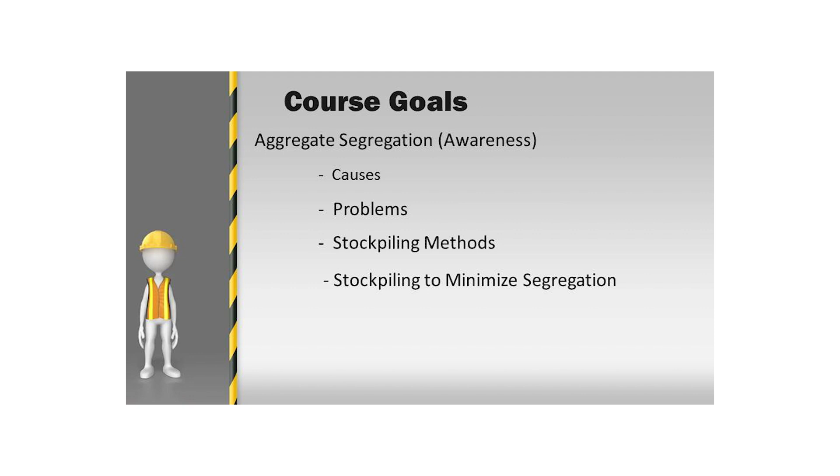Aggregate segregation is the separation of coarse and fine aggregate. We will learn the causes of segregation, the problems created, and ways that we can stockpile to minimize aggregate segregation. We will learn of the importance of proper loadout and sampling techniques, how to minimize segregation in loads or samples, and explore potential problems and solutions.

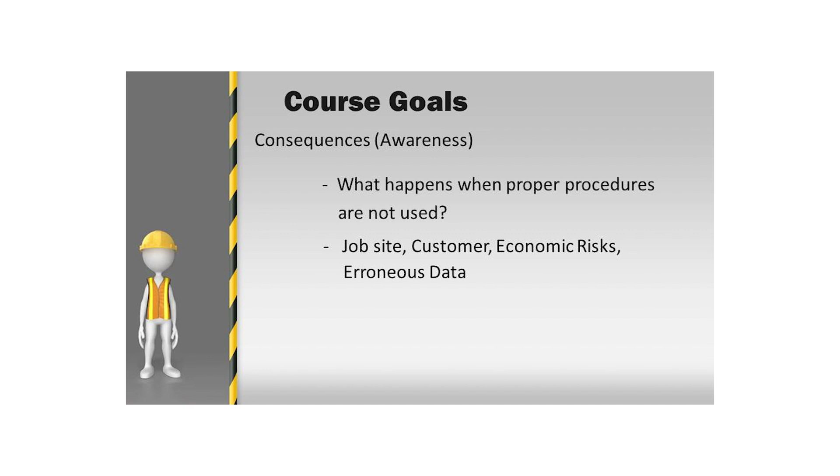There are many possible consequences, most of them negative, associated with segregation of aggregates. The techniques learned here will minimize segregation and the associated risks. It is important to remember that we are using a relatively small sample, in this case 70 pounds of material, to make a determination of the contents of a very large stockpile, in this case nearly 50,000 tons. So we must use consistent and approved techniques to ensure the reliability of our test results.

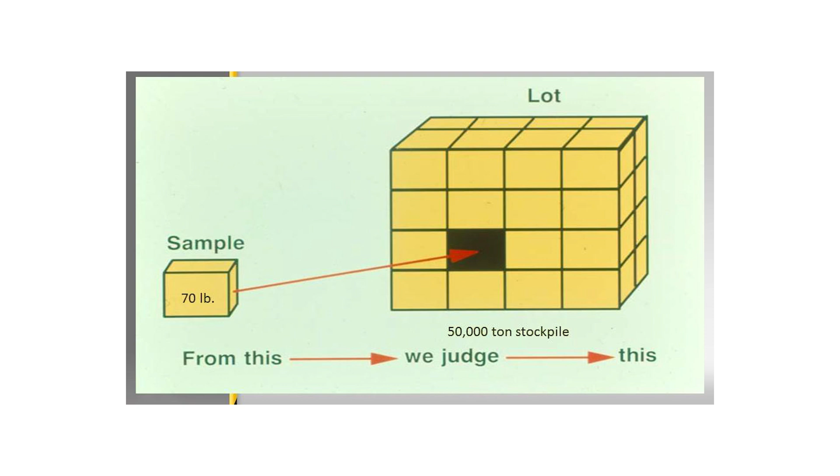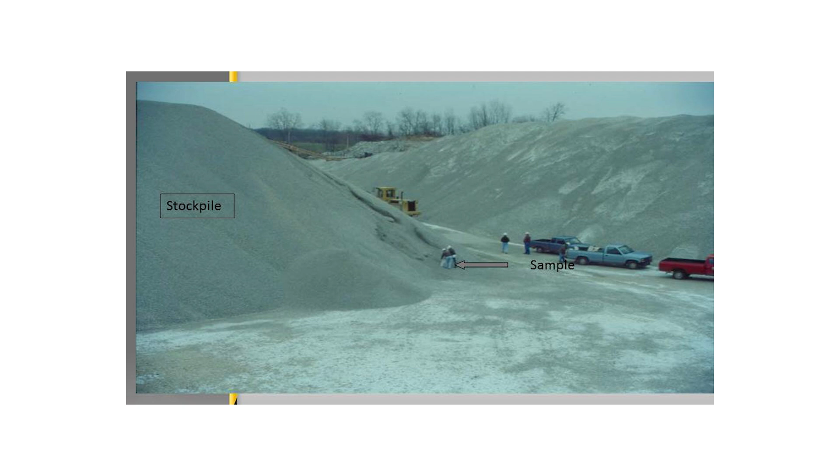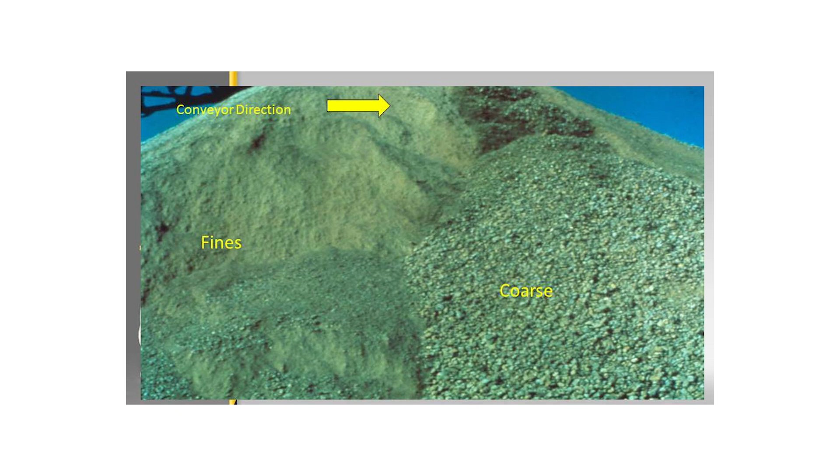Knowledge of the placement of the material into the stockpile is critical to recovering representative samples. In this photo, the conveyor is moving from left to right. You should note that the coarse material is concentrated towards the front of the stockpile, and the fines are toward the rear. This illustrates an extreme segregation case, but we need to be mindful that all aggregates exhibit similar characteristics.

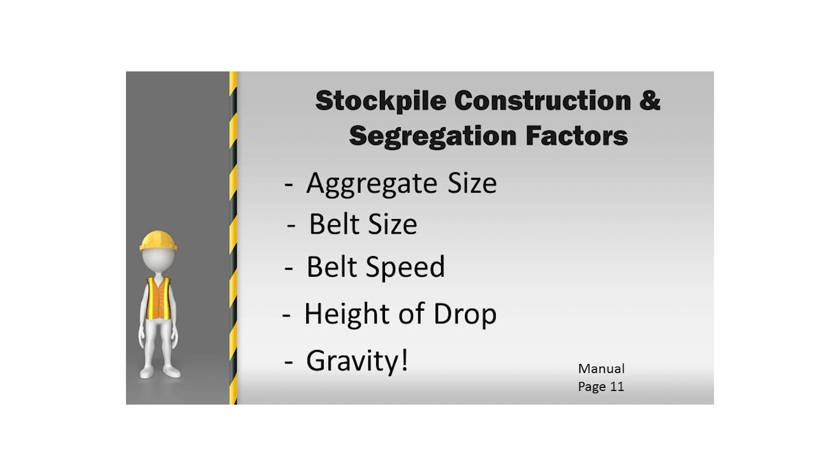Here are the stockpile construction and segregation factors: aggregate size, belt speed, the height of drop, and gravity. This can be found on page 11 of your manual. In addition, wind and weather, moisture content of the product, stockyard space restrictions, special products and materials can have various different segregation characteristics.

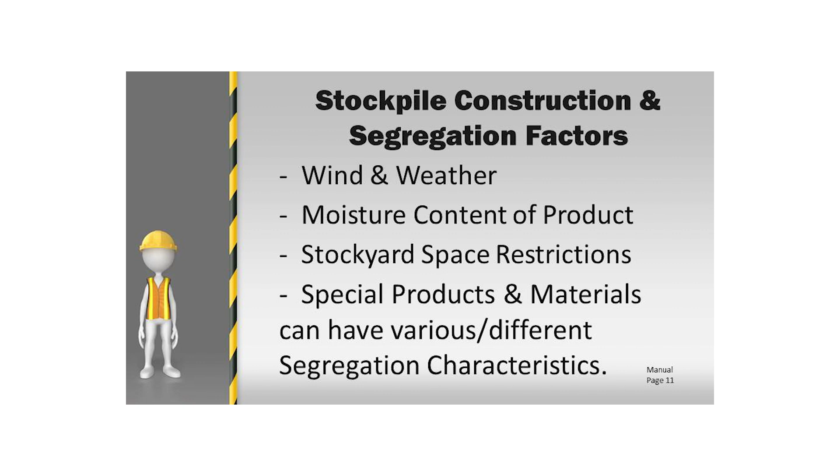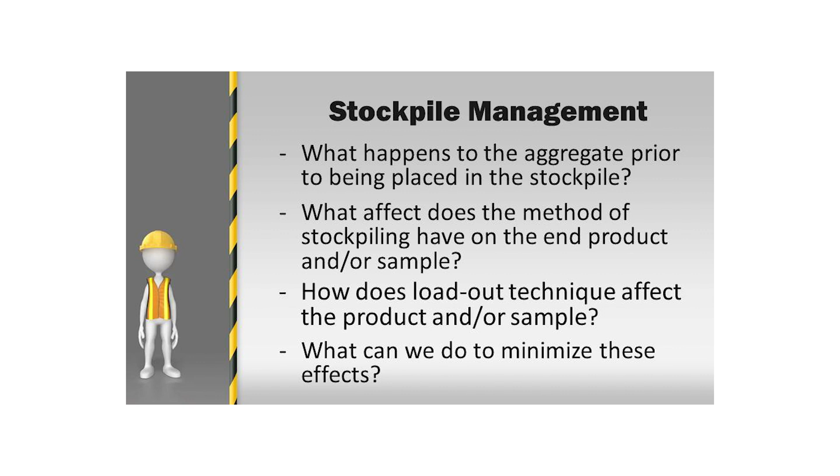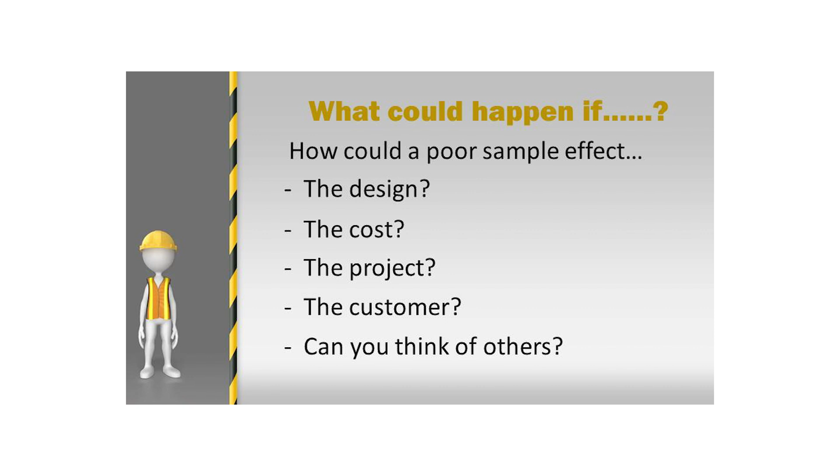Think to yourself, why is stockpile management important and why does it matter? Ask yourself these questions. What happens to the aggregate prior to being placed in the stockpile? What effect does the method of stockpiling have on the end product or sample? How does loadout technique affect the product and/or sample? What can we do to minimize these effects? Ask yourself how a poor or unrepresentative sample could affect these factors: the design, the cost, the project, the customer. Can you think of other outcomes?

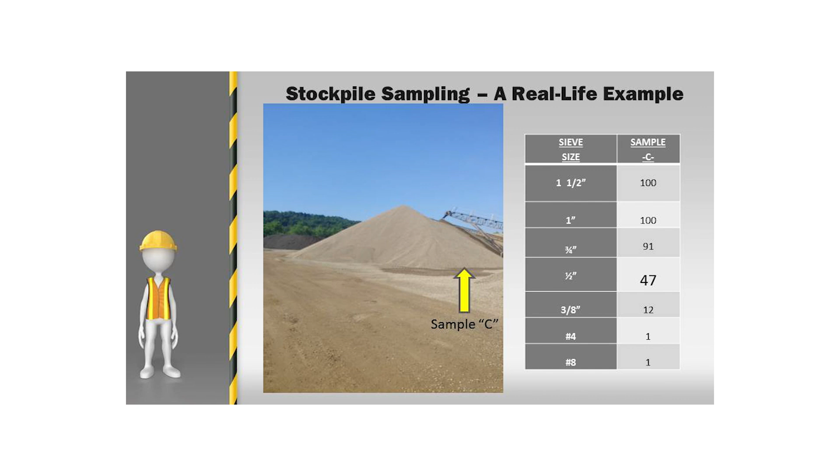This is an example from an Ohio aggregate workshop in 1996. Sample A was taken from the front. See the gradation to the right. Sample B was taken from the middle. Sample C was taken to the rear of the pile.

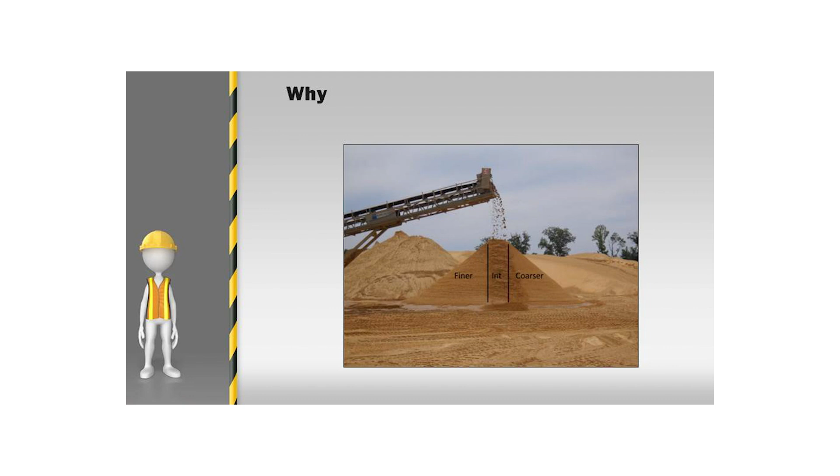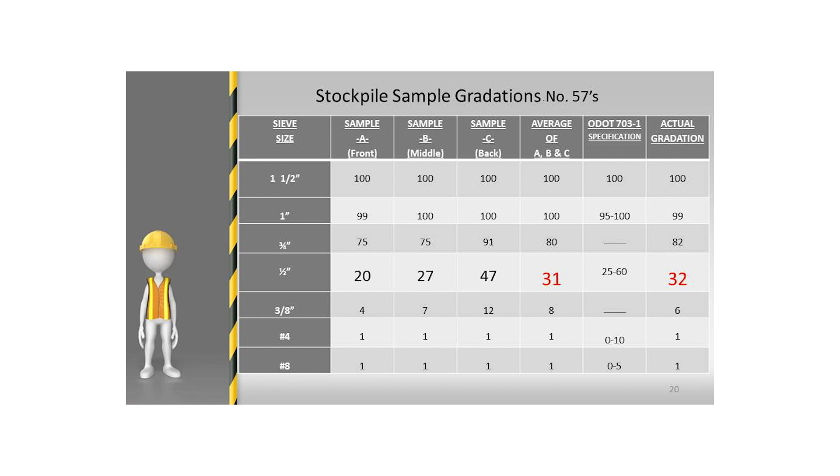As noted earlier, gravity allows fine material to move to the bottom of the belt while coarse moves to the top. Vibration and length of belt travel can compound this movement. If we were to recombine samples A, B, and C, our gradation matches the expected gradation of the material acquired from belt cuts. This is a great illustration of why we sample from the front, middle, and back of the stockpiles and combine the samples.

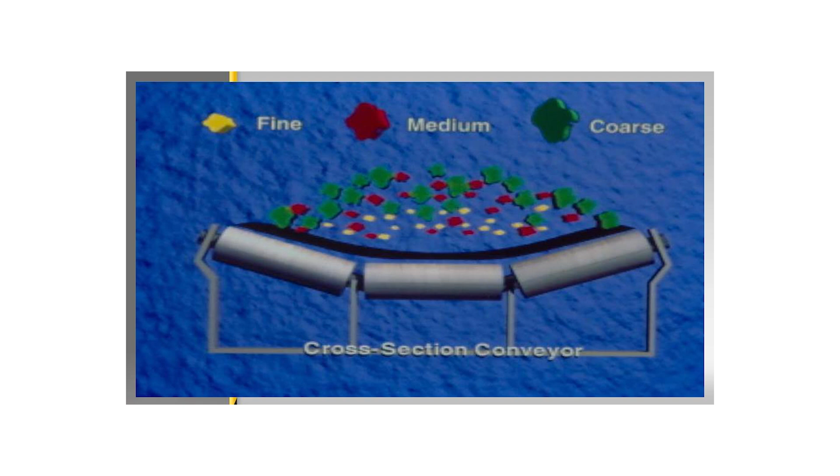This screenshot, taken from the video you are about to see, demonstrates the movement of fines to the bottom and coarse aggregate to the top of a moving conveyor. This segregation of coarse and fine materials is shown in the screenshot. So when we combine the three samples from the example, we get a gradation that is very close to the known content of the stockpile. This is the basis of the front, middle, back sampling procedure that we will discuss.

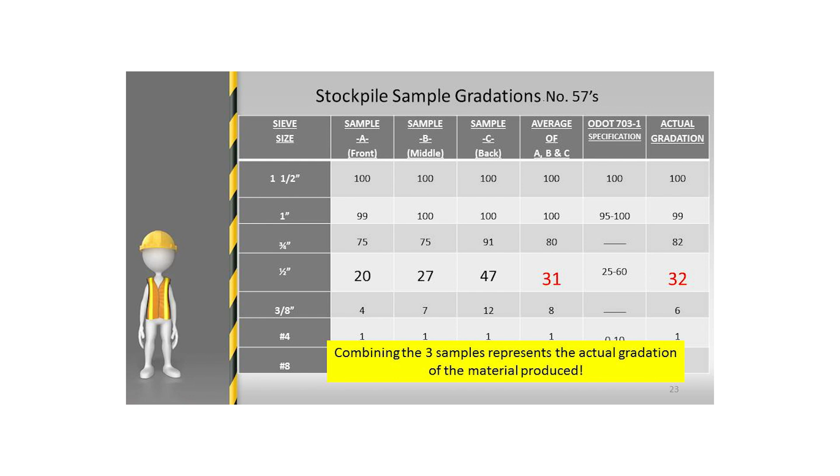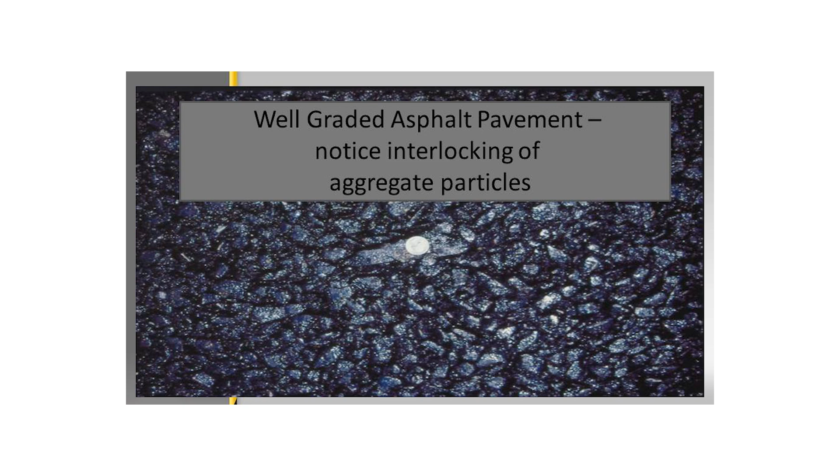What if an erroneous gradation due to poor sampling practices were used in the design of an asphalt or concrete mix? We want our mixes to be a consistent combination of coarse and fine particles that interlock and give stability. If we are not consistent in our testing and sampling, we jeopardize the integrity of the asphalt or concrete mixes. Aggregate gradation specifics are found in Section 703 of the ODOT CMS.

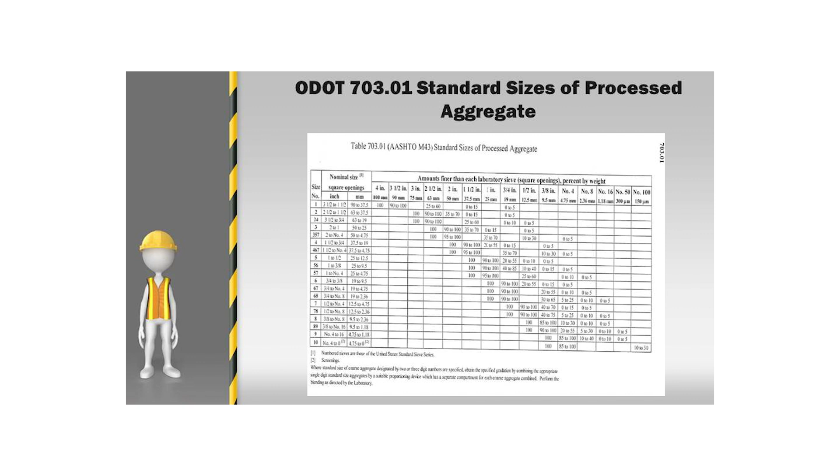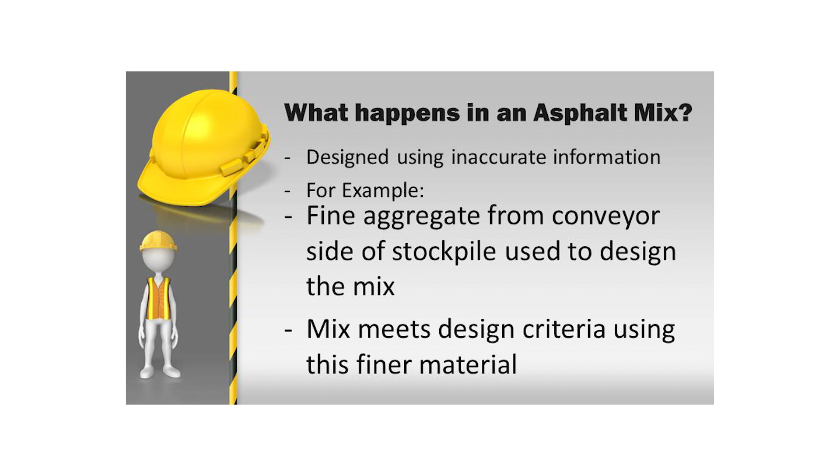Here are the standard sizes of processed aggregate. Ask yourself what would happen to an asphalt mix given this scenario: designed using inaccurate information, for example, fine aggregate from a conveyor side of stockpile used to design the mix. The mix meets design criteria using the finer material. Fine material was used to design the mix, but coarse material is delivered to the asphalt plant. What are the possible consequences?

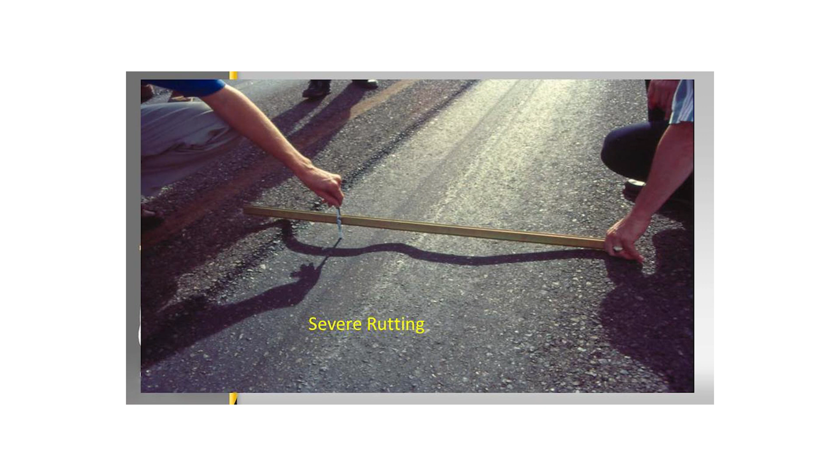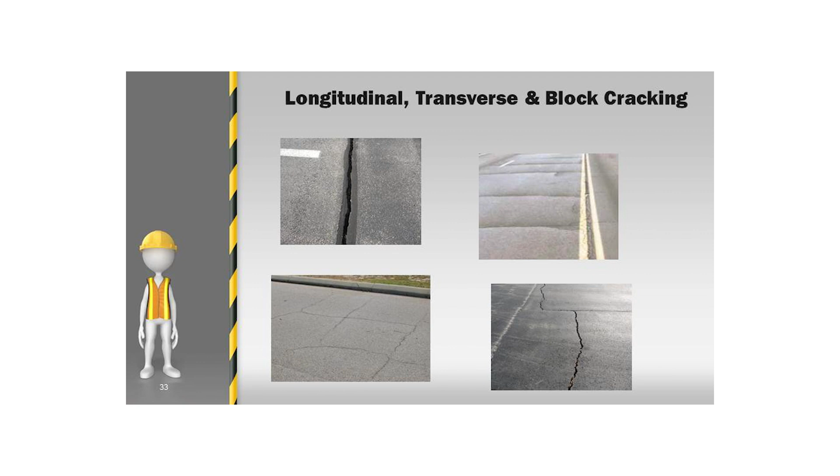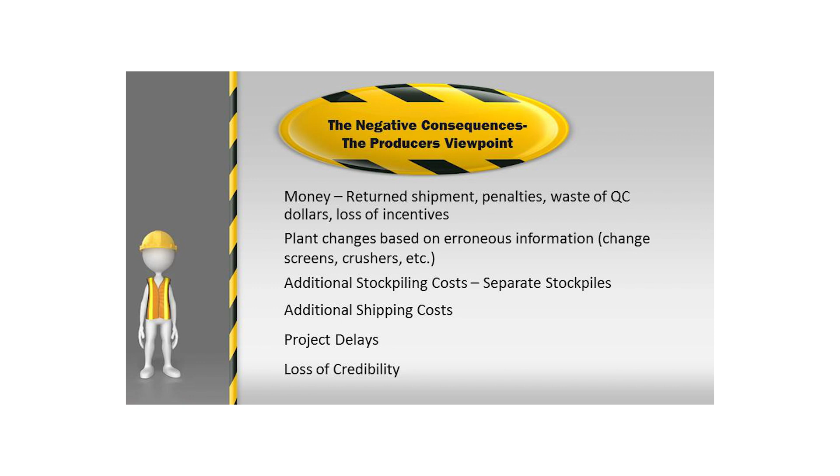These are just a few of the negative consequences a producer may experience due to poor stockpiling, sampling, or testing. Can you think of others? Our customers see project delays and downtime resulting in poor perception and loss of credibility. We have to have a plan to deal with failed tests or questionable results. What does our quality control plan say?

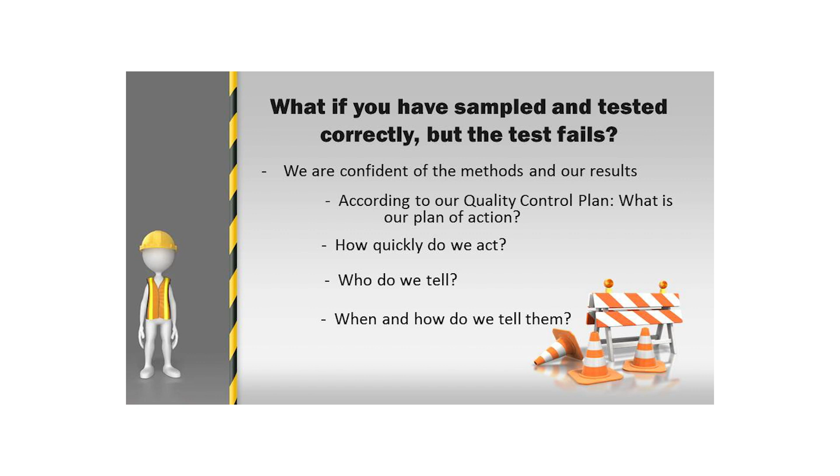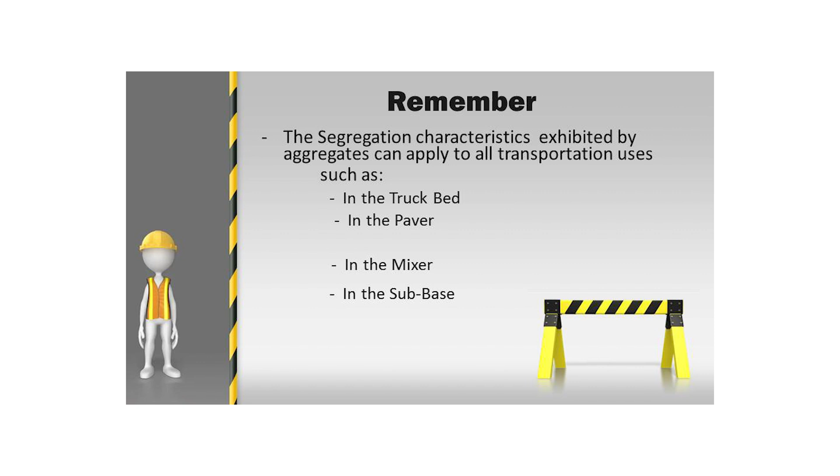Remember, the segregation characteristics exhibited by aggregates can apply to all transportation uses, such as in the truck bed, in the paver, in the mixer, and in the subbase. Remember, our job as aggregate producers, suppliers, and technicians and/or loader operators is very important. Errors in loadout and production sampling can have far-reaching consequences. We must be fully aware of the possible consequences in order to avoid them.

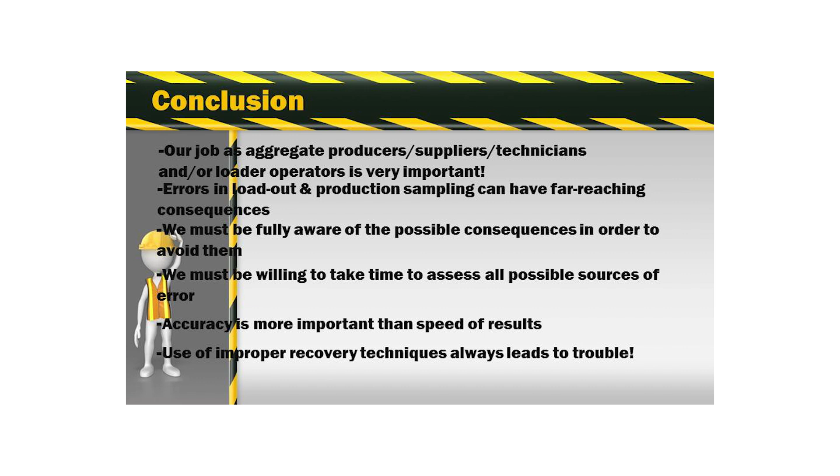We must be willing to take time to assess all possible sources of error. Accuracy is more important than speed of results, and use of improper recovery techniques always leads to trouble. We must use accepted recovery and sampling practices to ensure reproducibility, precision, and reduction of errors.

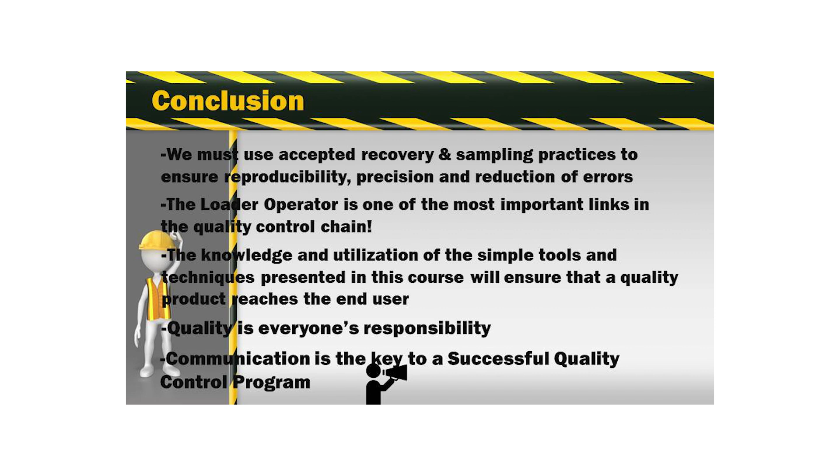The loader operator is one of the most important links in the quality control chain. The knowledge and utilization of the simple tools and techniques presented in this course will ensure that a quality product reaches the end user, because quality is everyone's responsibility, and communication is the key to a successful quality control program.

The bottom line is increased accountability. Can you defend your results? By using the knowledge acquired through Level 1 aggregate technician training, we're able to ensure consistent and reliable results. We'll be right back.